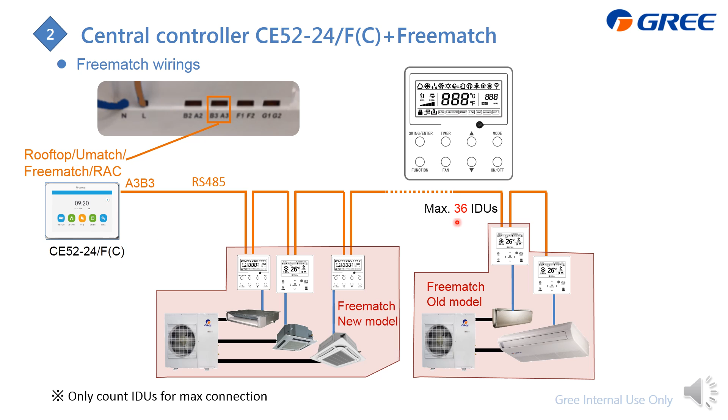This is for the FreeMatch new model only. As for the old model, it is similar; we require the wired controller as an adapter. They can combine together, and the CE52 can control up to 36 indoor units max. This is the wired controller, and I just put the typical model for your reference. It is Modbus communication, so if the wired controller is the last one, it also needs to be wired with the resistor to ensure the communication is successful.

But inside it there is always a built-in one. What you need to do is just to activate it. How to activate it is to change this switch. The detail is just to change the first dip from the off side to the on side. As for the others in the middle, just no change.

As for the other wiring, F1, F2 is for the fire alarm. When it receives the fire alarm signal, it will immediately shut down all the indoor units. And you'd better wire a matching resistor, which is 120 ohm here, to ensure the communication.

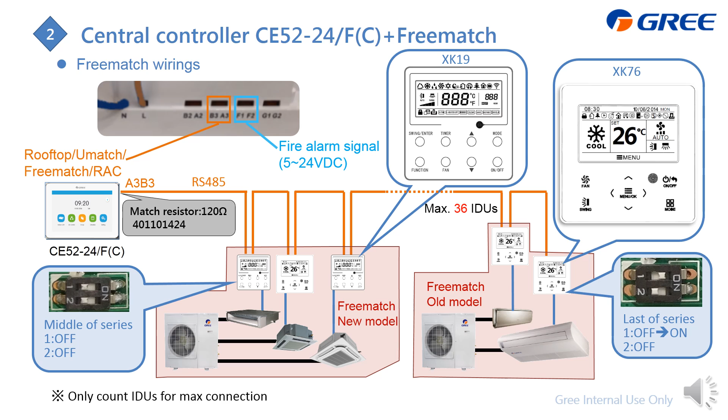This slide describes how to do the wiring from the central controller to FreeMatch, RAC, UMatch, and GMV at the same time. For the GMV, it is always for multi systems, only from the master outdoor unit G1, G2, connected here. Max it can support 16 systems and 255 indoor units. As for the FreeMatch and the RAC, it is the same. We need the wired controller as an adapter to output RS485 and connect to A3 B3 here.

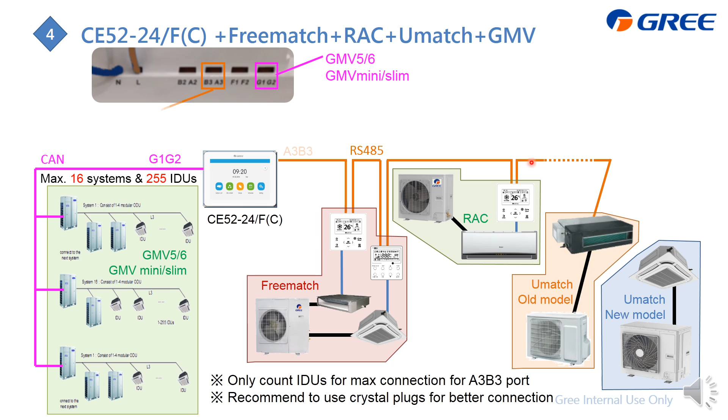The same for the UMatch old model, from the PCB directly. For the UMatch new model, we need an adapter ME50 to output RS485. For A3 B3, max is up to 36 indoor units. For the joints, we recommend using this crystal plug for better connection.

If we receive the fire alarm signal from F1, F2, the central controller will shut down all the systems and indoor units immediately. And to ensure the communication, don't forget to use the matching resistor at G1, G2, and also A3, B3.

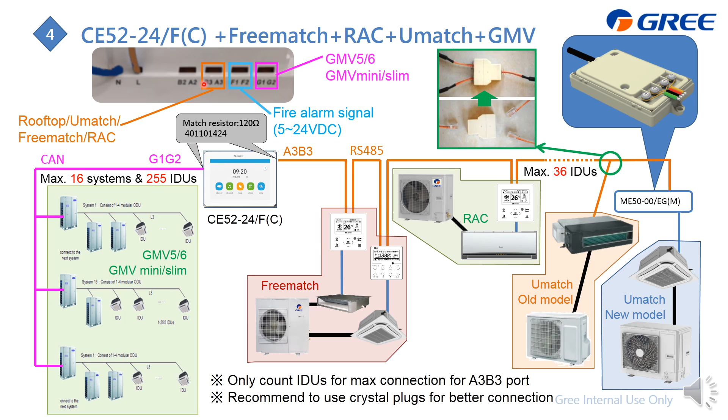This slide describes how to do the detailed wiring from the wired controller to indoor units. On the left side is the wired controller; no matter the model, there are 3 ports: this 1, 2, 3, and this 4-pin port. It is connected to the indoor unit, and the blue wire is standard with the controller, so no need to worry. You just need to connect from here to, for example, this port on the indoor unit. As for the cassette, duct, and floor ceiling type, connect from here to here.

As for the other 2 pins, this one and this one, they are RS485 in or out, which means you can just connect the RS485 here. For the wire, we recommend this one. The A terminal is already fixed with this socket, and the B terminal is already stripped, which makes it easier for you to do the wiring. We also offer the part code here.

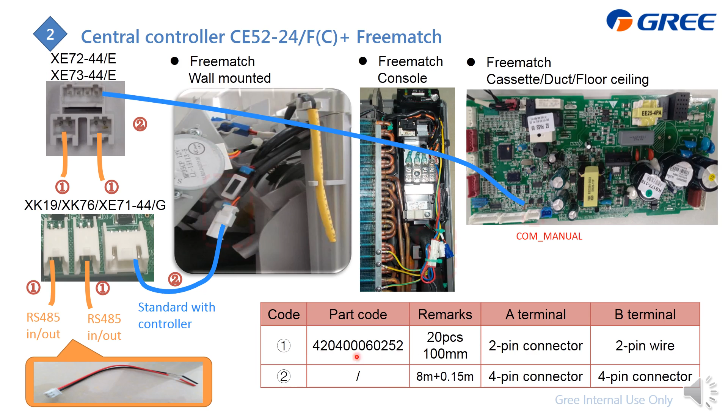After wiring, we also need to do the setting on the wired controller, which is to select the protocol and change the address. If you select the wired controller SK76, just follow these steps to enter this page. First change this one, which selects the protocol. We have 2; the central controller one is only for the CE50, which is obsolete. So if we would like to connect with the CE52, you need to select mode 1, which is the remote control address.

After that, different indoor units should have different addresses, which means changing this address to make them different. Then, if it is the last Y controller, don't forget to activate the built-in resistor by changing this switch, which is located here. If it is the last one, just change the first dip from the off side to the on side. If it is in the middle, please keep it unchanged.

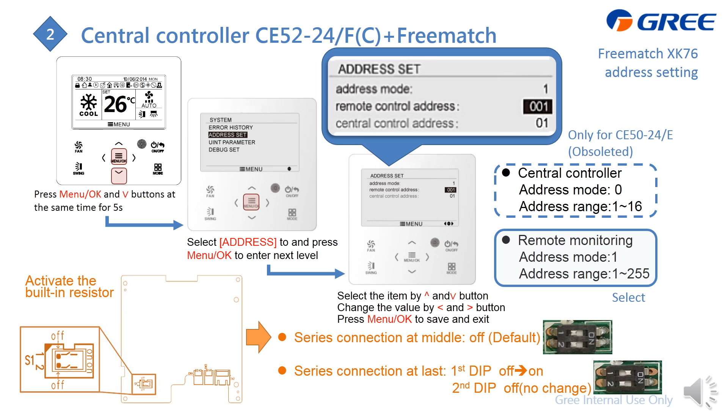If the wired controller is XK19 or XE71, here are the steps you need to follow to change the address. Just change this value for different wired controllers. Besides, if this wired controller is located last in the series connection, don't forget to activate the built-in resistor. This one is just at the back of the wired controller. Here is this switch. What you need to do is just change the first dip, if it is at the last, from the off side to the on side.

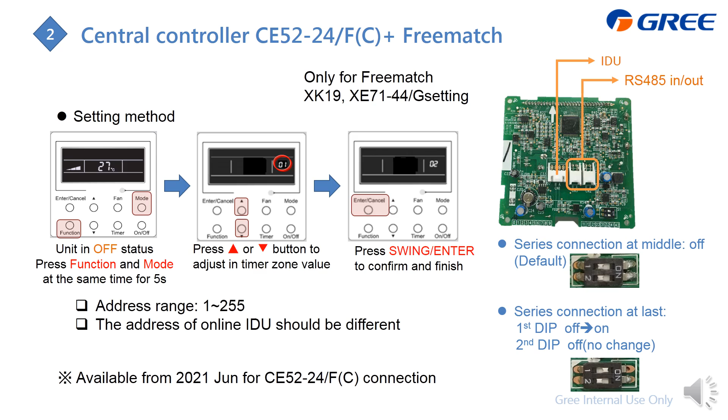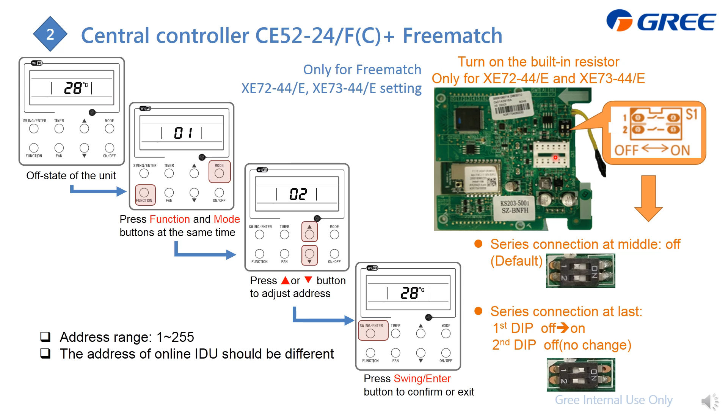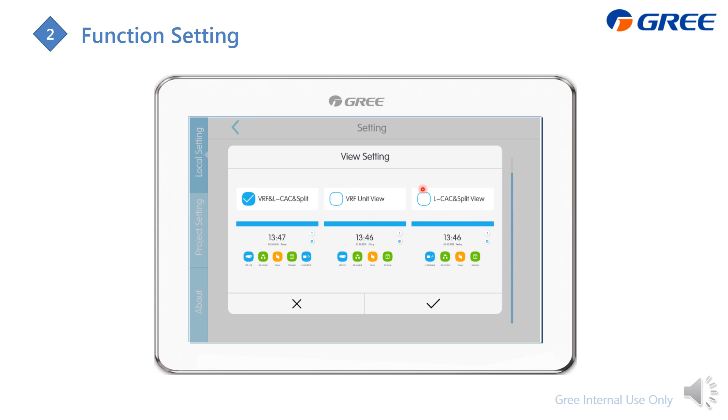And with the schedule, you can make a schedule of how your system will operate according to your project or your plan. And at this setting, you can choose the display language. Currently, we provide multi-language for your selection. And this is the view setting: according to your project and your wiring, you can select to display the GMV and the light commercial air conditioning unit, or only the GMV, or only the light commercial air conditioning unit. It's up to you to select.

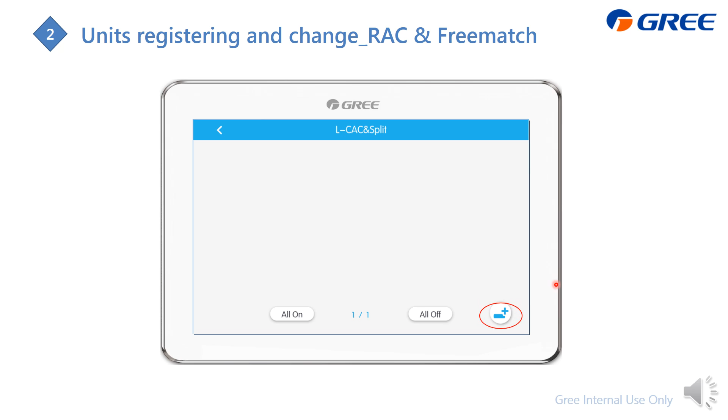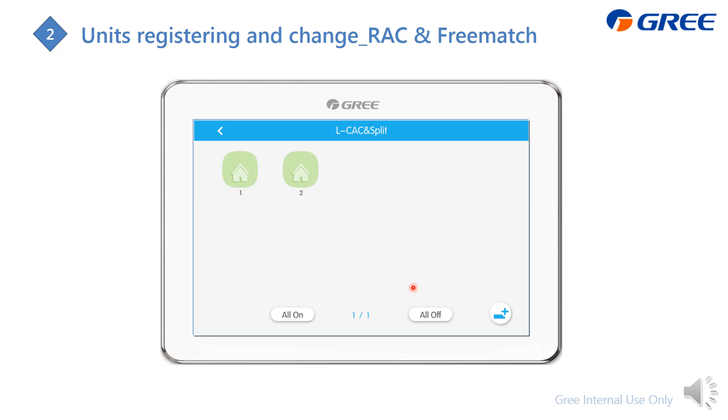Then, for example, we just need to control the RAC and the Free Match, which is only this part. So first we need to add the online indoor units, right? Just press that button, go to this and press here. It will detect all the online indoor units. In this case, we just find there are two. So just tick them and then press here. Then these two will be on the list. From this page, you can turn all on or all off. And by long pressing this icon, you can also change the name and the icon.

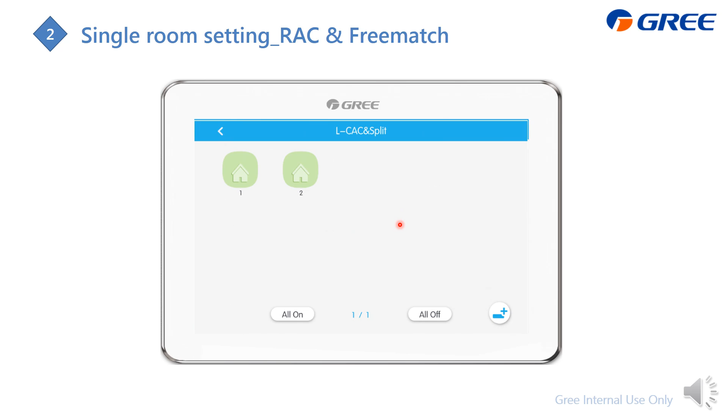And we will go to the detail control page. When you press, for example, the first one, on this page you can change your appointed indoor unit's setting temperature, operating mode, fan speed, and how the louver swings. And at the advanced setting, we offer all the functions for you. Also pay attention here, this is the shield function, which is to shield the control from the wired controller. We offer you to shield all commands, or shield on/off, or shield changing the mode, changing the temperature, or using the save function.

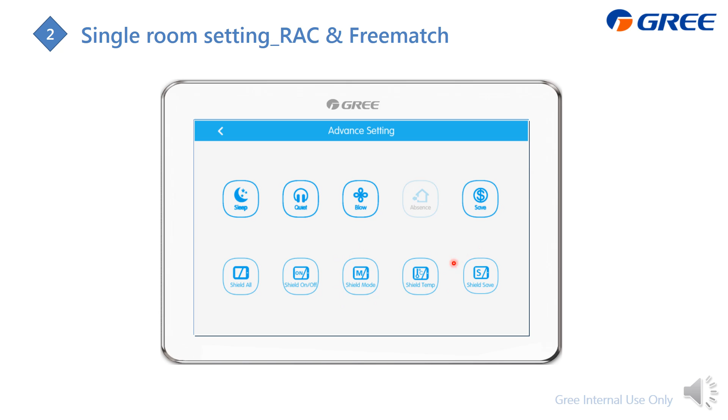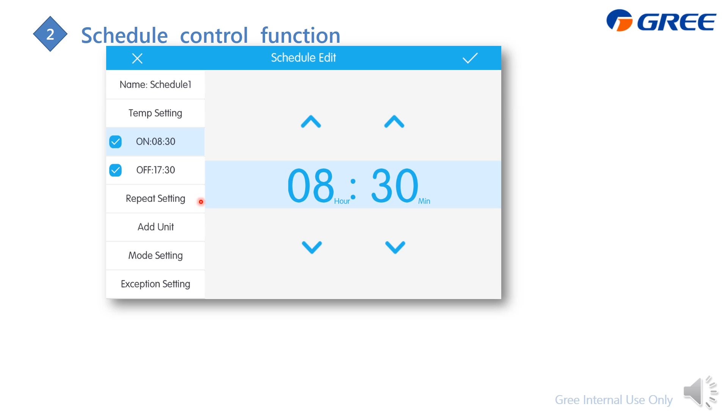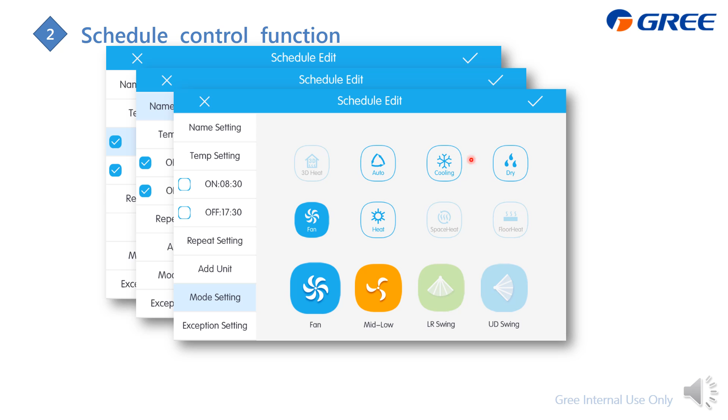And this is the all control. No matter whether it is the GMV or the light commercial air conditioner units, it's here. And you can set them all to the same setting. Next is the schedule control function, which means your appointed indoor unit or group can operate in your appointed time. For example, you can change the on and off time, and how and when to do it again. You can also change the schedule name to make it different. Here is the detail of the schedule, with different modes and functions, and what date it will repeat.

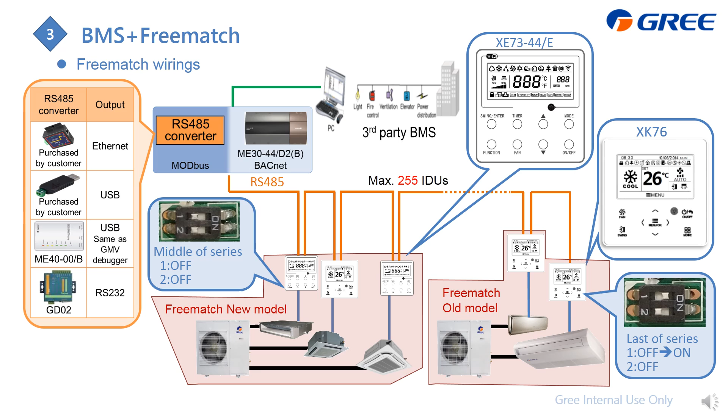And if the protocol of the BMS is Modbus, you need to apply this converter. This one can change the protocol from the PC to Modbus, which means the PC, according to this one, can control all these indoor units. Actually, just control all these wired controllers. If the BMS protocol is BACnet, you need to apply this ME30 to change the Modbus from the wired controller or from the indoor unit to BACnet.

And the wiring is already introduced just like this. This is the RAC Freematch or U-Match. Just connect them, which output the Modbus protocol. Then connect to this gateway and output from here to the PC if there is only one gateway. And if there are two or more gateways, we recommend to apply this router for the combination, and then you can connect to the PC. And here is the detail.

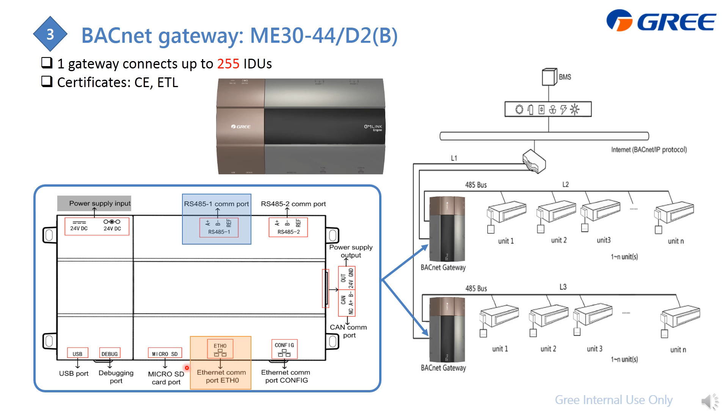This is the appearance of the gateway. Here is the power supply, and to get the signal from the air conditioner, which is the RS485 Modbus from here, and output, which is to the PC or the BMS system, just from this ETH0 port. It is Ethernet cable. And here is the detail. You will find it from here. There is a panel. When you pull it up and remove it, you will see the indicators.

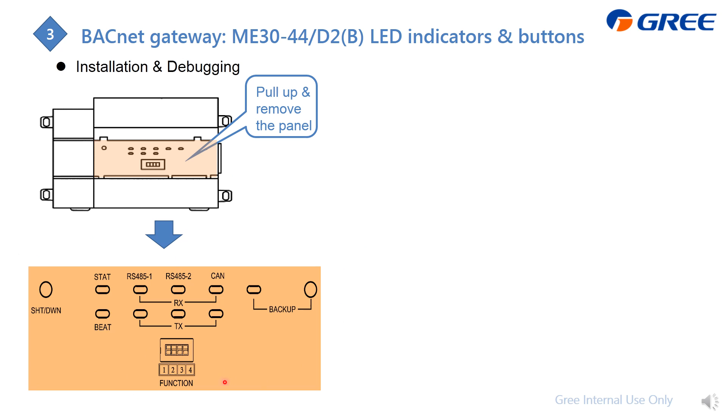And here is the dip switch, which is here. And first, the CAN is no use, and we just focus on this RS485-1. This one means it will receive or send the data from this gateway. And also, if the connection is okay, when you power on the gateway and also the RAC system, it will flash. That means it can receive and also send the data.

And there is a button, which is this one. This is for reset, which is if you make a mistake on the communication or the commissioning of this gateway, then we allow you to do the reset, which is to restore it to the factory setting. How to set it is hold this button for 5 seconds, and if the setting is successful, then all the indicators will turn on.

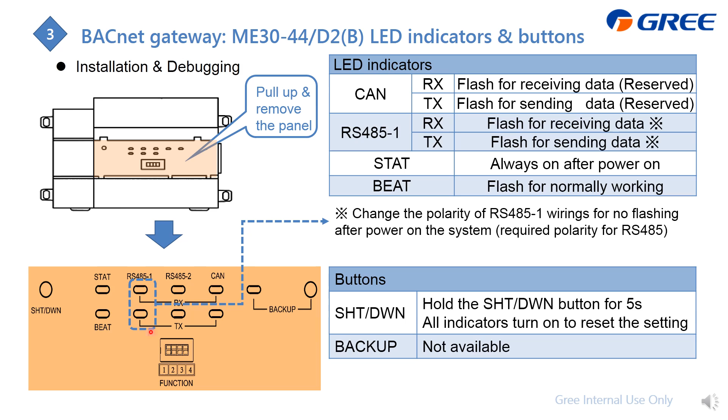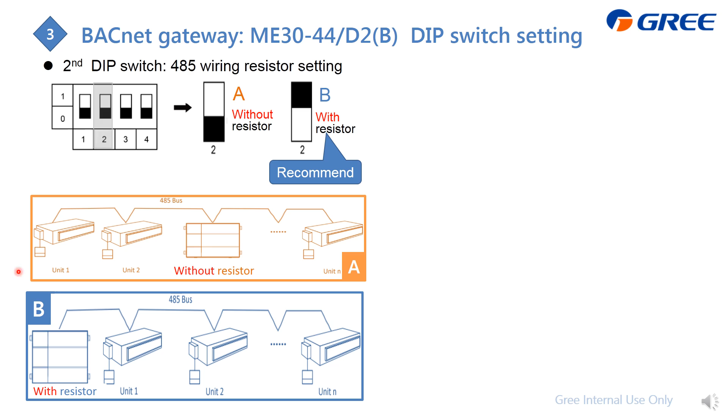Dip switch setting. This time we only apply this second dip, which is to turn on or turn off the built-in resistor. As it is RS485 connection, if this gateway locates at the head or tail of this RS485 bus, then we need to turn on this built-in resistor to ensure the communication. Although this A and B connection is allowable, we recommend this B to ensure the communication. And how to restore to factory setting is already introduced.

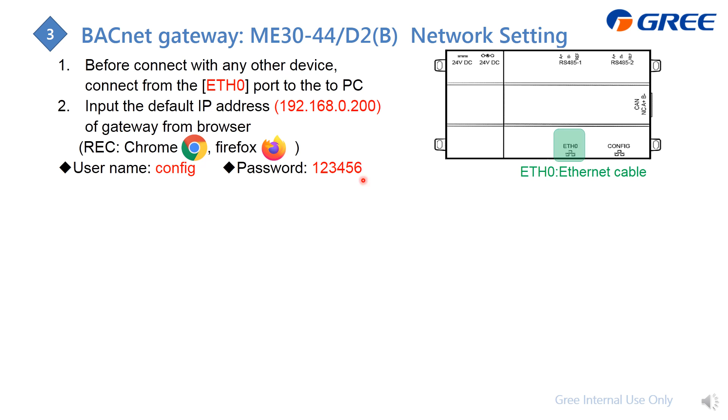Next is how to do the commissioning from the BMS system or PC, which is to tell this gateway how to transmit the data to the PC or BMS system. At this one, you need to first do the wiring, which is from this Ethernet cable, this ETH0, to the PC, and also at your PC, you need to use the browser to input this IP address. Then we will offer you the username and password. Just input them, and then you will go to the home page, and also at the upper side you need to select this one, PRI, for the setting.

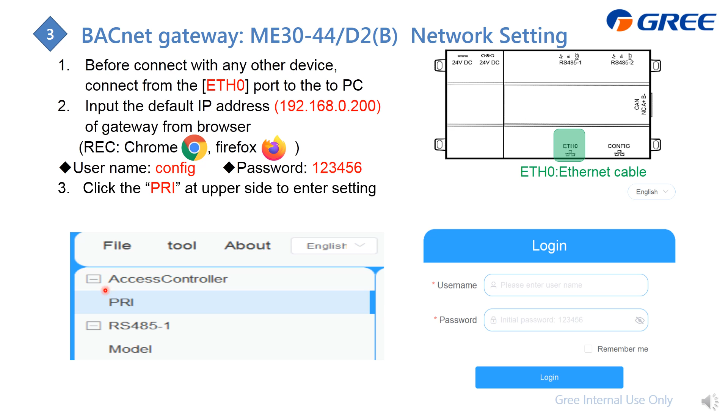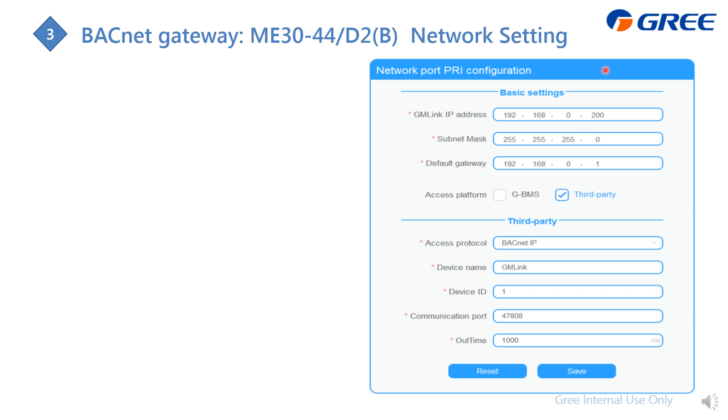Which will go to this page. Here you will find that there is lots of information you need to set, and this 1, 2, 3 is the parameter of this gateway, which is to tell the PC where to find the data, which is go to this IP address and also the detail of it. And of course, if there is only one gateway, no need to change. If there are 2 or more gateways, change the others to be different. For example, change the last one to be 201 is okay.

And also the device ID, this is to identify if there are 2 or more gateways. For only one gateway, also keep it no change. For multiple, change it to be different is okay. After that, press this save. And then the system can recognize where to find or where to send the data. And the last is to select which system. Actually, GREE also has this BMS software, and if it is a third party, tick it here. And the last thing is to reset the power for this gateway to energize.